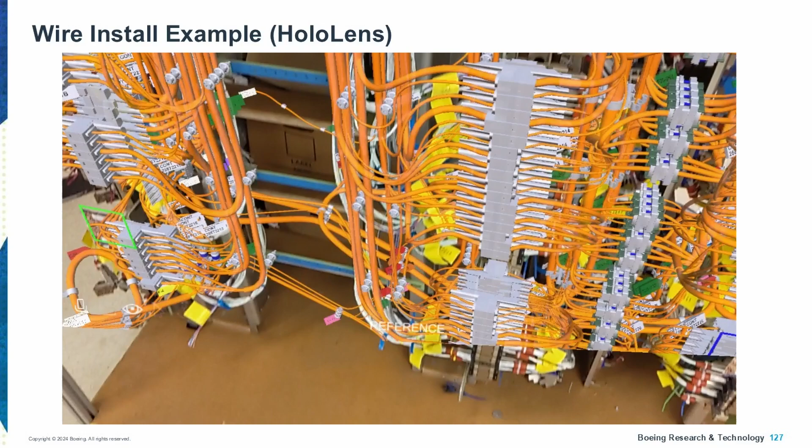So I'm going to jump into some use cases. This first one is a wiring use case. This is on a rack in our lab. We use this for testing our system, and it's a real wiring section from an aircraft. You can see pretty complicated wiring, and if you had to install some of that wiring on that rack, you would have a hard time doing it if you were following a paper instruction.

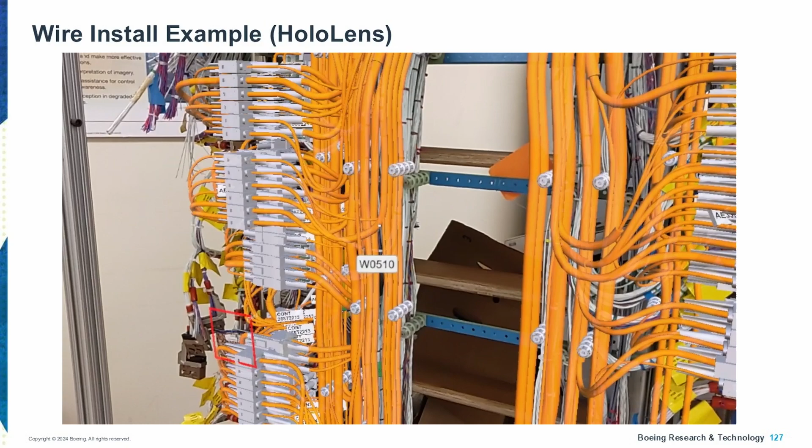So some of the features here, that's the user interface, you'll see more of that. We can turn on a feature called callouts. What that does is, from a HoloLens, wherever the gaze cursor is hitting one of the wire bundles, it's showing you the wires that are within that bundle. So that could be very useful if you were trying to track or trace a wire throughout an aircraft or a section.

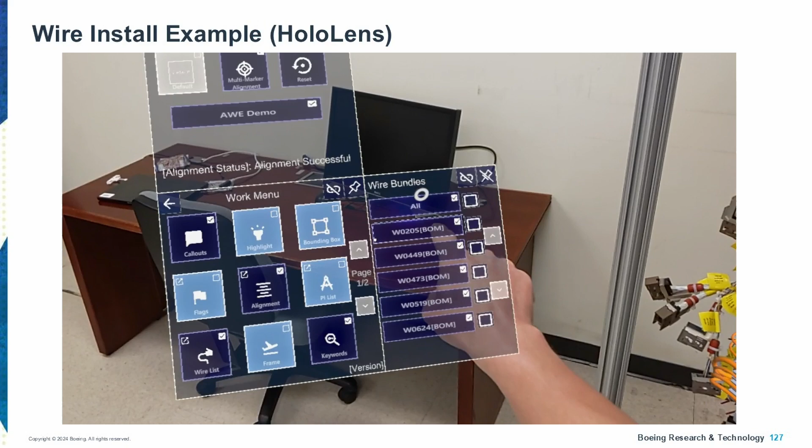A couple of other features: you can isolate particular wires. So if you see on the right-hand side, some of them have the word BOM, bill of materials, after them. Those are the wires that, for this particular installation plan, have to be installed. There's usually only a couple per IP, we call it an IP. That would be about 2 hours worth of work, so it might be 2 or 3 wires installed. So you can actually understand for your job which wires you have to install on that whole section.

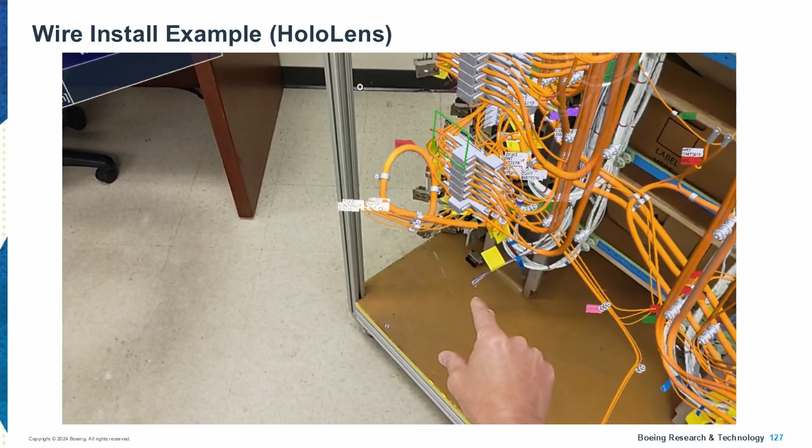There's a few features that I didn't capture in the video. If you see these little things here, this red flag note and these white things, they all have metadata behind them, so that might be linked to a spec, or it might be an ME-authored work instruction or some other relevant piece of information for that location.

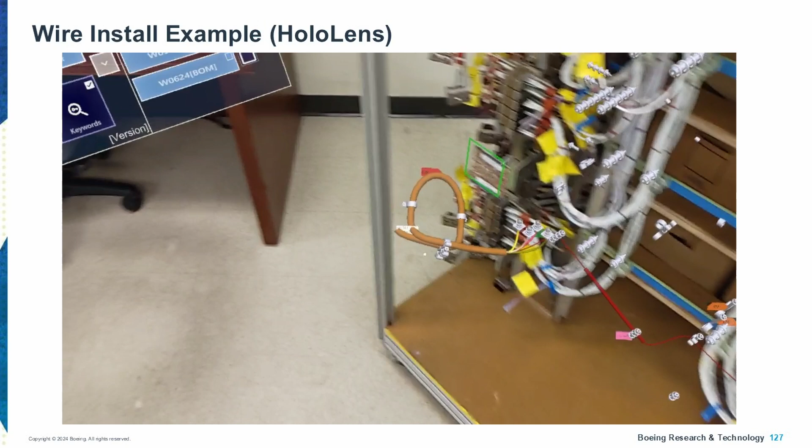Those are all available within AR. You can click on it and a little window will pop up and it'll show you the link to the spec or anything like that. But the main point here is we had to aggregate data from about 10 different systems to create this view. And those would have been systems that an electrician would have had to go to on a computer to log in separately, to all of those things to understand the task.

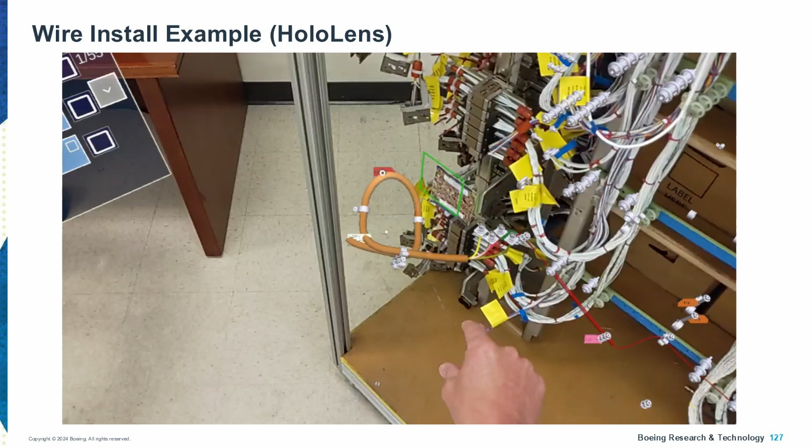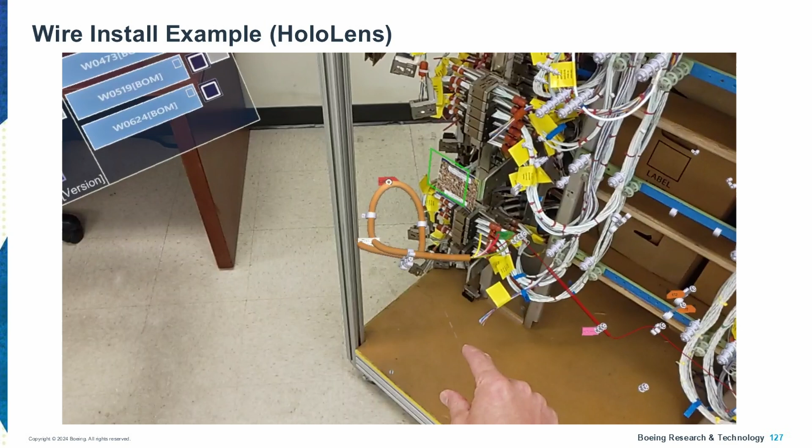We have built a pipeline from those 10 systems all the way through. We use Unity in this case, I'll get into that in just a moment, all the way through to an AR experience. So we can now pull, there's probably thousands or tens of thousands of these drawings across the commercial fleet, and we can now view any of them in an AR scene within a few minutes. So that's what I mean when I talk about the scalability of this.

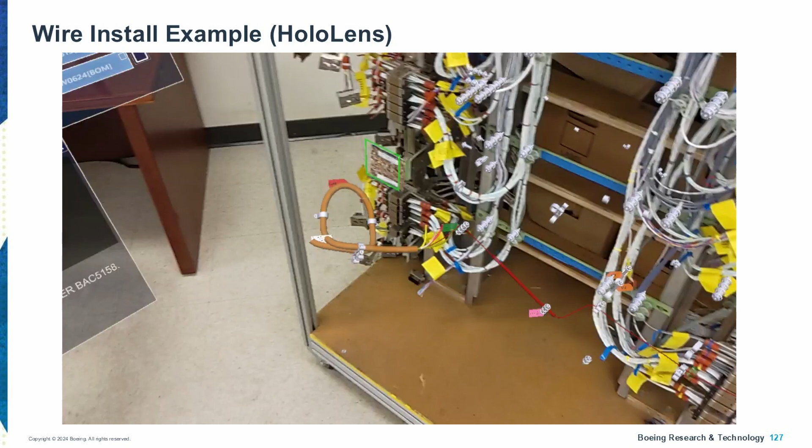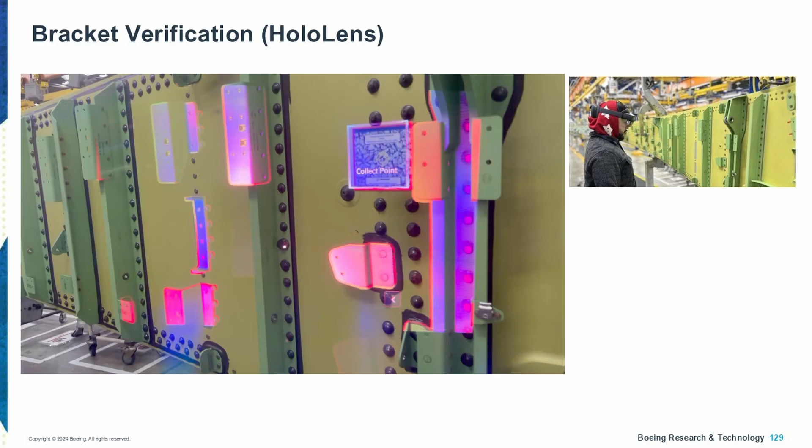It's very important not to get stuck in what I call pilot purgatory. It's a whole world of difference to actually do this versus a standalone demo. This is the bracket use case I was mentioning. So this has become a really big deal.

Basically, we've just imported the geometry for this configuration of brackets. A person uses a HoloLens in this use case. This one is in production. We've actually got an IP and installation plan written that requires them to check out a HoloLens, put it on, log into Bark, and do a visual sweep of this part.

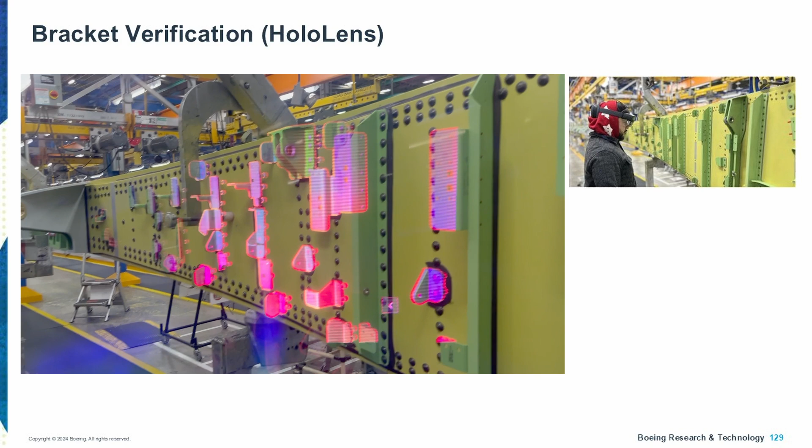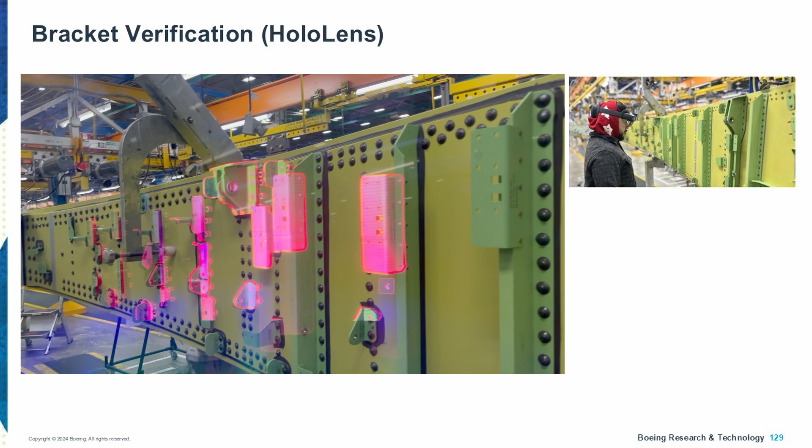This is a wing spar. They do a visual sweep, make sure all those brackets are in the right place, and they cannot move on until they've done that and agreed that per the HoloLens view, everything is in the right place.

Now, the issue here is this particular program has hundreds of variations. Airlines can order them differently, different minor models, so these brackets might be different on every aircraft. It's not a case of once you've done one, you can do them all, because they keep changing. So that's why we did this. Bark has the ability to pull in the exact configuration for that exact line number, because we're not doing anything manually—it's actually pulling from the source engineering design every single time. So that's become a really big use case for us.

Okay, so let's talk about why we're investing in all this, which obviously we're investing quite heavily, and we have been for years. We've really identified these 4 effects, and we've talked a lot about some of them. So we're really honed in, really focused on the reduction in errors and the reduction in assembly time.

Training requirements is great—we can train people in the basic skills and sort of supplement that with AR. That's great. We know that AR helps increase people's retention of instructions. That's also great. But these two, time and errors, are really where we're laser focused.

I think Lightguide shared some data before, I know Scope has looked at this—many people have looked at these numbers. We did a study in the factory where we did over 2,000 hours worth of usage from mechanics using a HoloLens to install wiring, very similar to the first video that I showed. And then we had the same people, the same wires, the same aircraft, exactly the same jobs on airplanes before the HoloLens and then airplanes with the HoloLens.

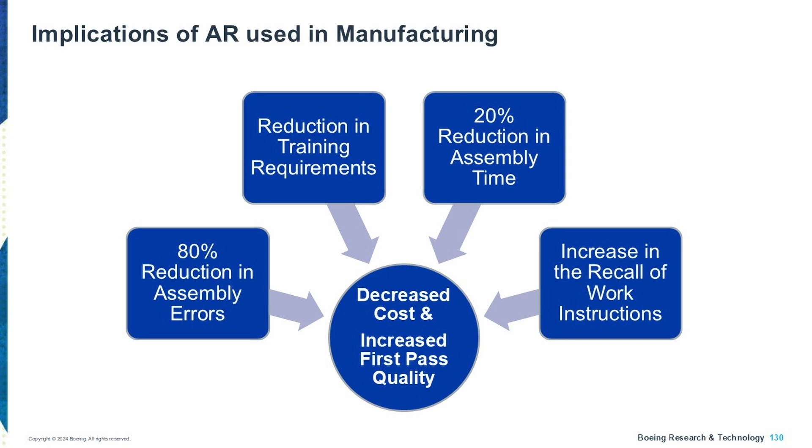And we did it over 6 airplanes. We looked at the time to complete each job and the number of mistakes made, and we saw the number of errors went down by 80%, and the time to build went down by 20%. So those things are huge, right? Combined together, you might think if you were trying to reduce errors, you would have to go slower. But in this case, we can drastically reduce errors while also going faster. So I know I'm preaching to the choir here, but I wanted to show this data point as well as one more thing we're trying to realize.

We recognize the need for a hands-free solution. Not that everyone wants to wear a headset—many people don't. Paul did a great job this morning talking about the pros and cons of each way of delivering AR. But we really want to be as agnostic as we can, so we can let users decide what works for them. And Bark is actually built that way—you can view the same data set on different devices.

Bark Services is the back end, hosted in Boeing's internal cloud infrastructure. It's many different services doing different things, but it's a collection of things. It extracts data from repositories, converts it, and can deliver it to a particular user based on user logins.

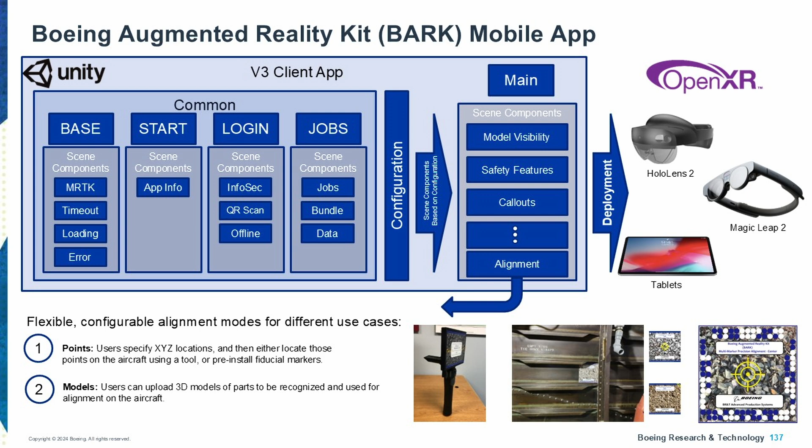So a lot of the components are the same across all the use cases, like logging in, the safety part. There's certain common, consistent themes. But then depending on the use case, sometimes you're displaying callouts, or sometimes you're doing an AI inspection. Those would all be components loaded specific for that use case. And again, this single code base can be deployed on different devices.

I'll just talk briefly about alignment. I'm going to speed up a bit because we lost a bit of time. How we align in the aircraft, so we've already talked about accuracy. We've got several methods of aligning. Just so we're on the same page, when I say alignment, I mean if you're viewing an AR scene, the error between the virtual content and the real world, how accurately can we get that. So we have a few different ways of doing it.

The first one was this, we call it the wand. It's just a 3D printed tool. It's a Vuforia marker there, and you just touch predefined points of the aircraft using it, which is all set up through the website. Users configure their own alignment points on the website. And then when you touch 3 of them, pretty straightforward, we make a coordinate frame, and now we understand how the device relates to the aircraft.

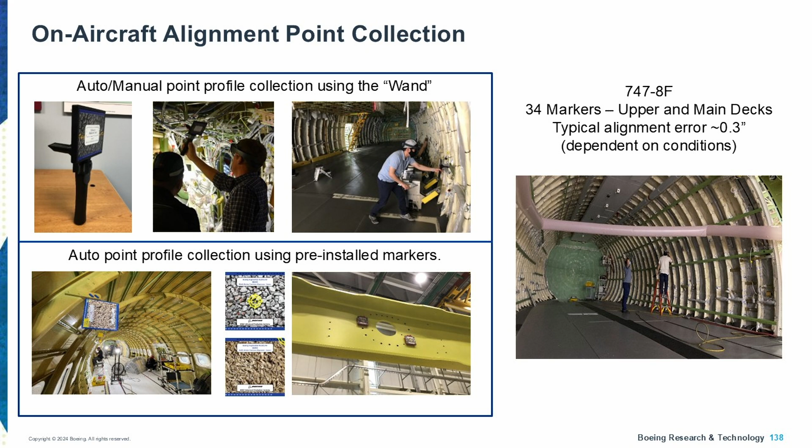Similar concept, some teams are designing these 3D printed holders just to basically mount markers, sort of old school, but still really reliable and repeatable, and easy to do for someone. So most people, I would say, are still using markers. They've slotted them in holes, it clips in this bracket, whatever they want to do. Using these approaches, we can get about 0.2, 0.3 inches, but of course it's a little bit dynamic, and not something you can really rely on all the time.

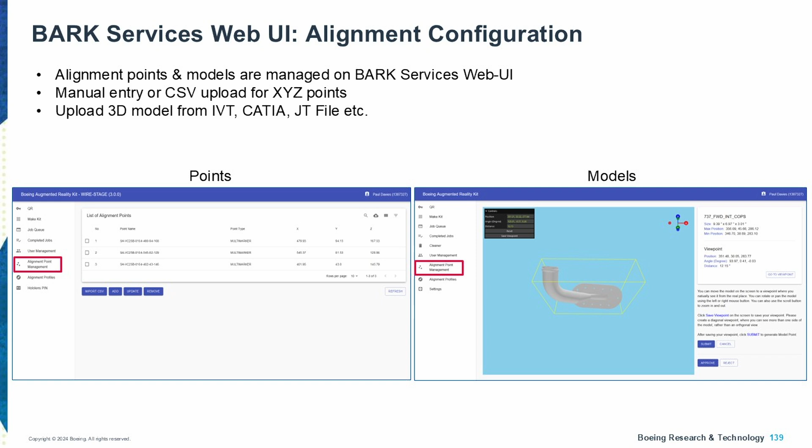And then more recently, we've been working with PTC model targets. So that was that one video I showed to begin with. We've integrated their model target generator using a command line interface on the back end of Bark. So you can upload a small model and say, hey, I just want to recognize this water bottle or whatever and use that for alignment. We've just deployed that. And more and more people are slowly moving over to using aircraft parts instead of markers for doing alignment.

OK, just a couple more slides. So now onto the AI piece. What we really want to get to is, in the case of verification of brackets, have AI tell us whether brackets are in the right place or not.

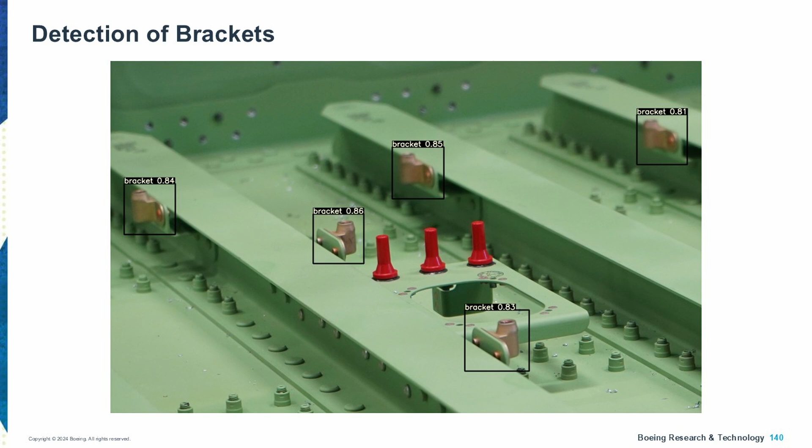We have an internal AI organization at Boeing, and we've been working with that team. They've been working on object detection models for particular parts of interest. These brackets are a little different than the ones I showed earlier, but they would go out and collect data, take a bunch of pictures of that bracket, that part, and train an object detection model on how to recognize it in the future, given some imagery of it.

So we have a concept where we're going to have a repository of these object detection models, and depending on the use case with Bark, if you want to do an inspection, you'll check a box, and it will go get the object detection model for the pieces you're trying to find. Then, as you're wearing a HoloLens or an iPad or something, it will actually be able to find those parts real time in the image. This is how that will integrate, we think.

This is what we're currently working on today. We're going to go through the rest of this year working on this. So here's that repository. It's going to have all the pre-trained models of what parts look like, basically. The classifier is going to run on the mobile device.

Right now, we're using CoreML, so it's limited to iOS devices. On the Bark website, if you select that you're going to do an inspection, it's going to gray out the HoloLens. You're not going to be able to do this on the HoloLens currently. It's going to be only iOS.

And then in this wing use case, the goal is, we know where all these brackets should be because we have the BOM, we have the engineering design. So we're just going to take a little crop of where we think each one should be, run it through that classifier that's been trained on what it looks like, and then it will return a confidence level of whether it's actually there or not.

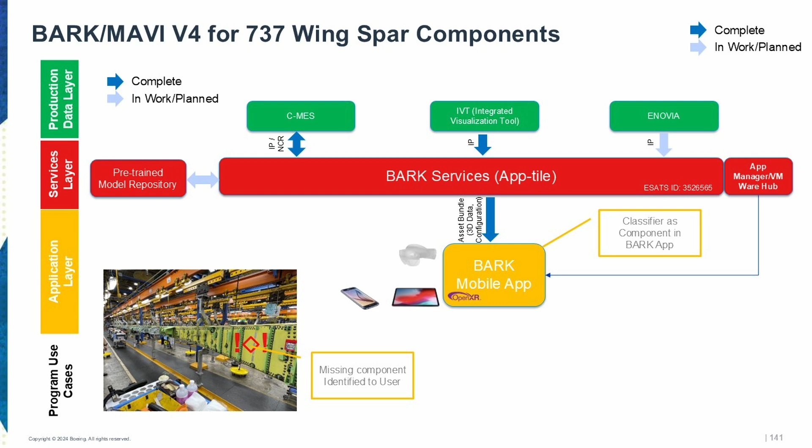And we'll set a threshold, so if it's less than 90%, we're just going to flag it, say it's potentially not there. Then the operator will get some sort of indication—that's just mocked up—saying, hey, there should be a bracket here, our object detection didn't find it, go double check that it's actually there. So we're trying to get to the point where you would do a visual sweep, and it would just direct the operator to exactly where they need to pay attention because there's maybe a missing part.

So I know that was a lot. That was my last slide. I know that was a lot in 30 minutes, and I wanted to give you guys as much detail as I could at the same time as showing you the breadth of everything we've done. So thank you for your attention. Happy to take questions, comments, whatever we're doing next.

Yeah, let's take a few questions. Yeah, thanks, Paul.

Paul, is your main AR use case always with internal employees, or is it also for outside use? Almost always internal. We develop this for our own consumption. I always say Boeing factory, Boeing data, Boeing people, Boeing product—if those four things, then yes, we would do this. We've started to branch out a little bit, working with some other folks. We've gotten a lot of interest in this from outside of Boeing, so we're still investigating how we might deploy it, use it in other industries, but that's early days. So, yeah, almost all internally at the moment.

Thank you. How are you stripping back CAD so it can work in the HoloLens enough? Like, the size of CAD sometimes can be bulky and hard to use.

So it's a good point. In the PiXYZ SDK box in the back-end view, we can actually set the level of tessellation there. We have a limit. On the HoloLens, we limit it to about 750,000 polygons, which is really pushing it. It's still a bit jerky at that rate. But any more than that, the job won't complete, and it'll notify the user that it's too big. So essentially that software is just scaling back the mesh to exactly fit.